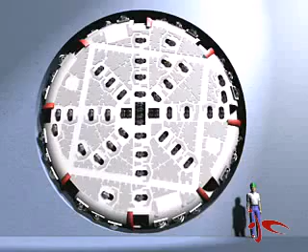This is the 9 meters diameter cutting head with 58 roller cutters of a tunnel boring machine, or TBM for short. This animated sequence shows how the so-called gripper functions. The automated gripper presses against the rock at the sides.

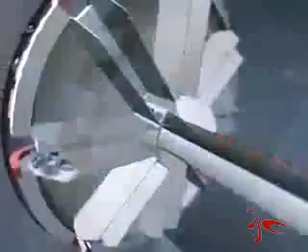The rotating cutting head is pressed against the tunnel face with a force of 26 tons. And under that pressure, each roller cutter chips the solid rock away. The broken rock falls onto a bucket wheel and is then transferred onto a conveyor belt behind the cutting head.

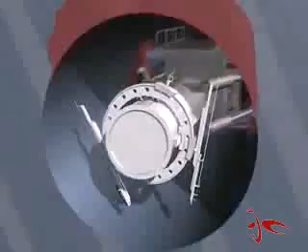While boring goes on, securing work is carried out under the protective roof immediately behind the cutting head. Here, for example, 2 anchor drills with independently maneuverable drilling carriages are being used. They are drilling holes into the rock for anchors which can be up to 4 meters long.

Another example is a mesh placing machine. This travels over the anchor drill and places steel mesh behind the protective roof to give protection against falling rock. Which securing measures are most effective against rock falls depends on the local geology. In one place, steel anchors are best, whereas in another it may be steel mesh, caps or arches.

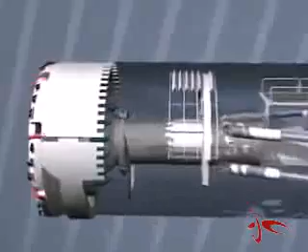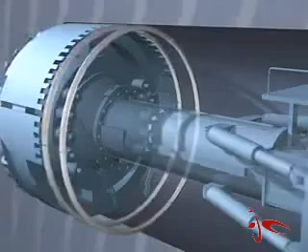Another means of securing are steel arch segments. The same mesh placing machine pre-assembles them under the protective roof. The complete ring is then transported to its final position, pressed against the rock and installed there. It would now also be possible to secure with concrete, but we'll come back to that later.

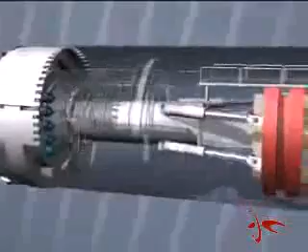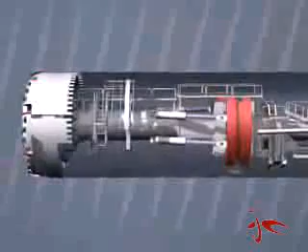When the TBM is working in hard rock, it uses a so-called gripper to press against the rock on both sides. Each stroke of the gripper takes the drive forward another 2 meters. The backup train moves forward with the boring machine. At the end of the stroke, the gripper is retracted, moved forward to the new position, and then tensioned again. The TBM can now cut another 2 meters.

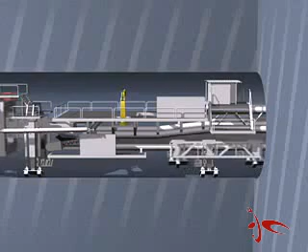Here we see, speeded up, how the feet are raised and lowered. When the second and fourth foot are raised, the backup train moves forward. When the first and third foot are raised, the cutting head drives forward.

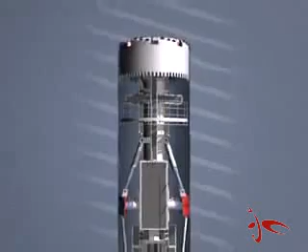Here we see the view from above. The hydraulic mechanism releases the gripper for it to move forward. Then it is tensioned again for further boring. The TBM can drive up to 40 meters per day. Hydraulic cylinders control the horizontal and vertical position of the cutting head. This makes it possible for the TBM driver to steer the direction at all times.

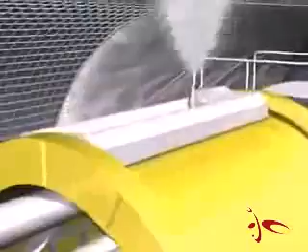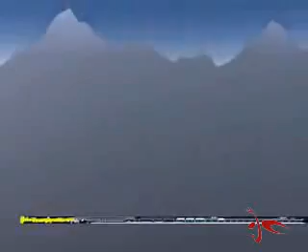The shotcrete robot now finally secures the finished tunnel walls. From the boring head to here is a distance of 60 meters. The backup train consists of all the installations and materials needed to supply the boring machine and remove the excavated rock. It is like a moving factory, 410 meters long, which is about as long as 4 football pitches joined end to end.

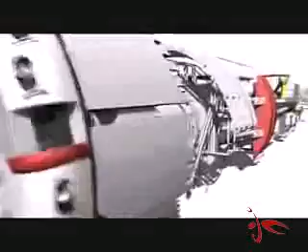This TBM was specially developed for the hard rock of the Gotthard. 50 of the 57 kilometers of both tunnels will be excavated with tunnel boring machines.